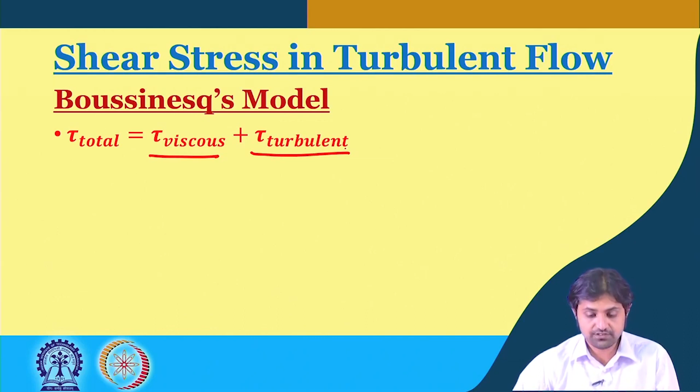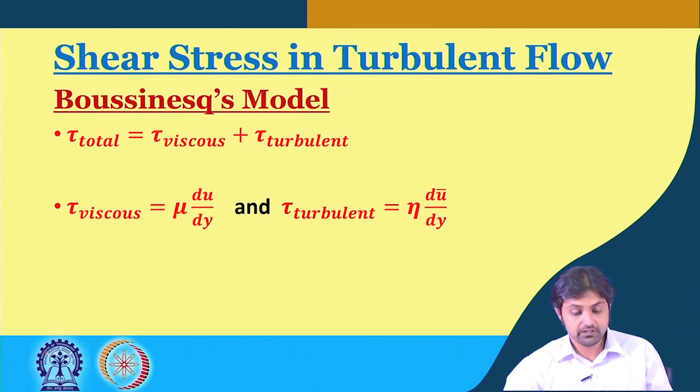So Boussinesq says, as tau viscous is mu du/dy for laminar flow, the shear stress due to the turbulence component is eta du/dy. This is similar — instead of mu there is something called eta, a new coefficient of viscosity, called eddy viscosity. We are not going to the derivation right now; at some point we can see these derivations when the appropriate chapter comes. But for now, take that the shear stress due to turbulence is eddy viscosity times du/dy, very similar to the shear stress in laminar flow, though the coefficient is different.

If we want to write a kinematic eddy viscosity, we write it as epsilon, which can be written as eta by rho, similar to the definition in laminar flow. What is mu for laminar flow? We have been doing that — it is 10 to the power minus 3 Pascal second. So mu for laminar flow is 10^-3 Pascal second, and if the flow is laminar, eta is going to be 0, because it is related to turbulent viscosity.

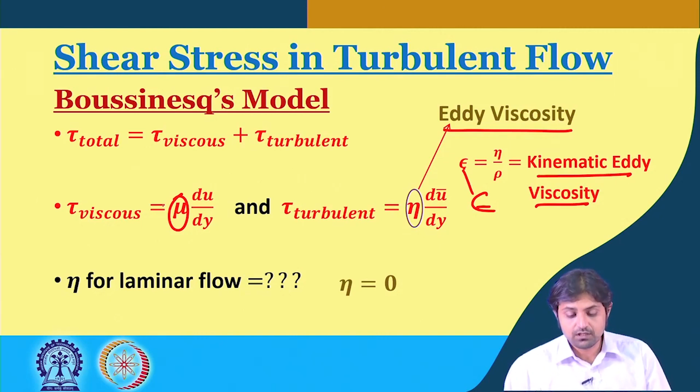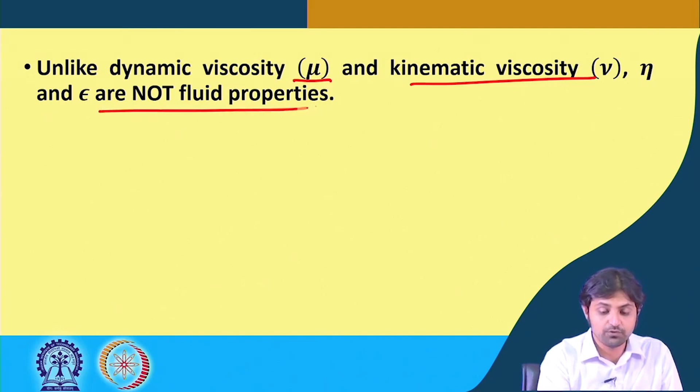So unlike the dynamic viscosity mu and kinematic viscosity nu, eta and epsilon are not fluid properties. The values of eta and epsilon are dependent on the flow conditions. So epsilon, the kinematic eddy viscosity, decreases as you move towards the wall and becomes 0 at the wall.

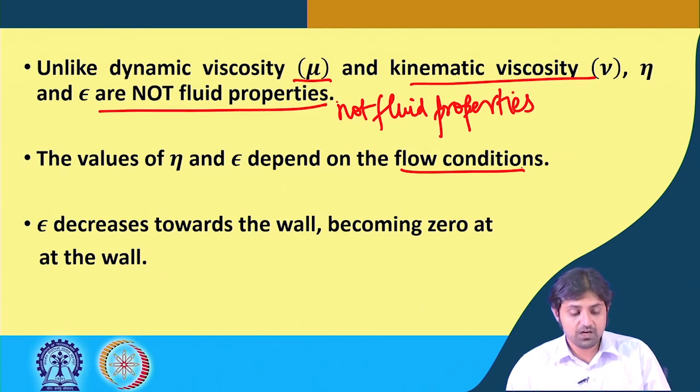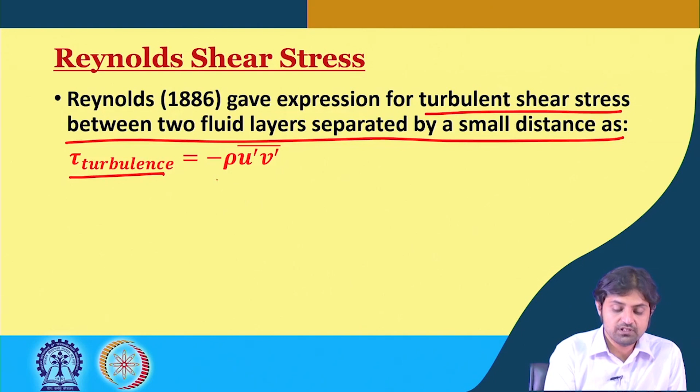Now, coming to what is Reynolds shear stress. Reynolds in 1886 gave expressions for turbulent shear stress between two fluid layers separated by a small distance, and he said that the shear stress due to turbulence can be written as minus rho times u prime v prime, time-averaged. Actually it is not an assumption, but this can be derived, which we will do at some point in this hydraulic engineering course, but not now.

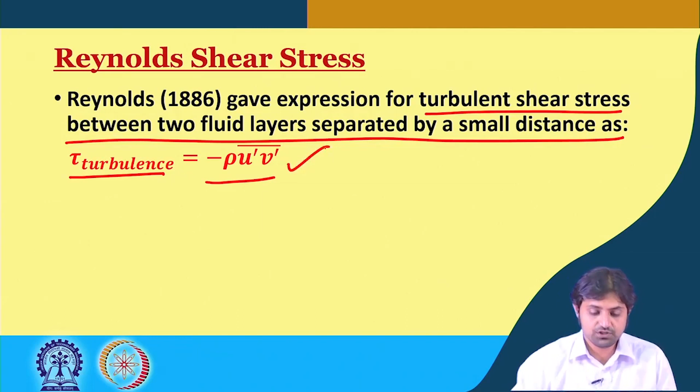So you have to understand Reynolds shear stress is given by minus rho u' v' bar, and it does not have only one component — it also has minus u' w' bar, minus v' w' bar. There are different components, some are normal shear stress, but this is one of the shear stress components.

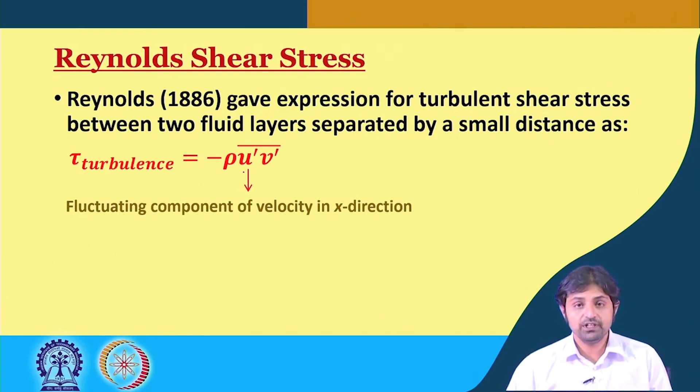What is u prime? That is the fluctuating velocity component in the x direction. V prime is the fluctuating component of velocity in the y direction. Experiments show that u' v' is usually a negative quantity, therefore tau turbulence, or minus rho u' v' bar, is a positive quantity. It has negative correlation, as we will see.

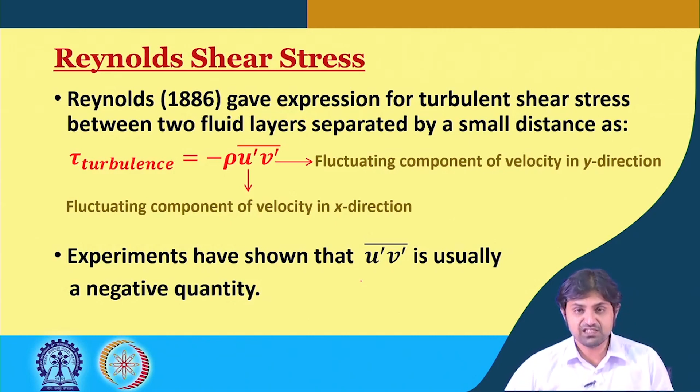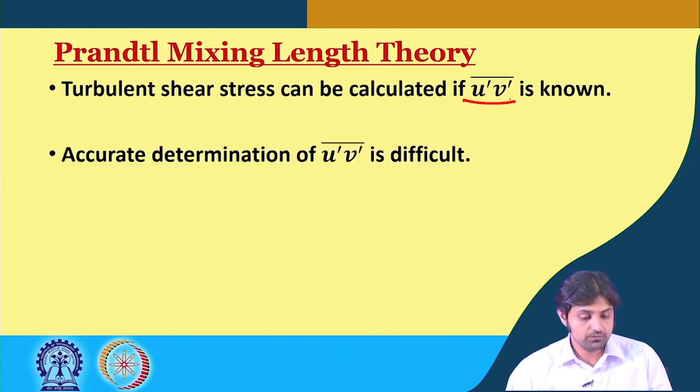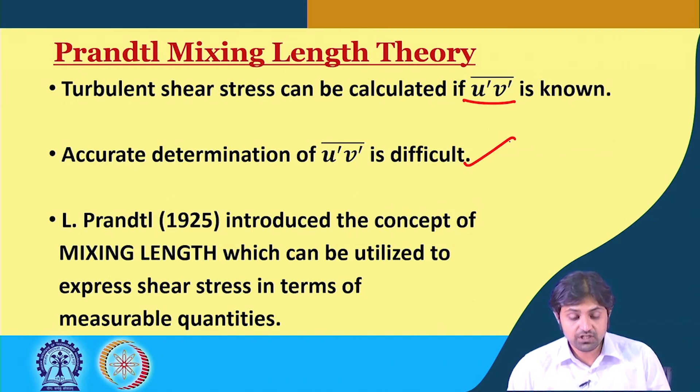Now there is a concept of Prandtl's mixing length theory. Turbulence shear stress can be calculated if u' v' bar is known, because as we saw, tau turbulence by Reynolds was given by minus rho u' v' bar. It would be nice if we could calculate u' v' bar, because that is unknown until now — accurate determination of u' v' bar is very difficult. Therefore, in 1925 Prandtl introduced the concept of mixing length, which can be utilized to express the shear stress in terms of some measurable quantity.

Mixing length Lm can be described as the distance between two fluid layers in the vertical direction, the y direction, such that bundles of fluid particles from one layer could reach the other layer and mix in the new layer in such a way that the momentum of the particle along the flow direction is the same.

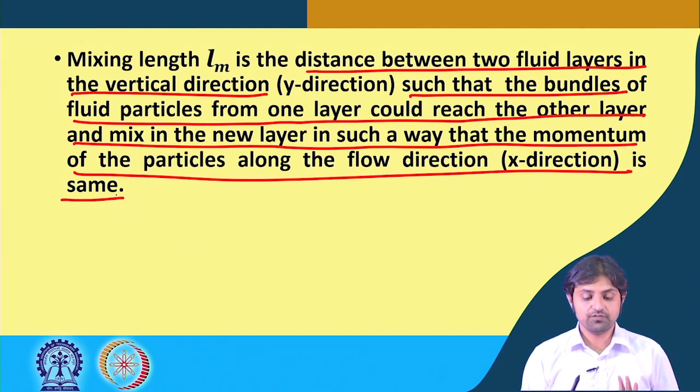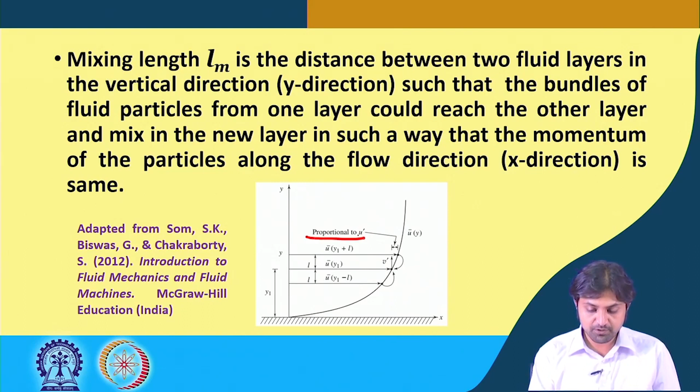We are going to explore this in more detail in the next slide. Prandtl related u prime to the mixing length Lm. He said, as you can see in the figure, u prime is proportional to mixing length, but I'll write it on the next slide.

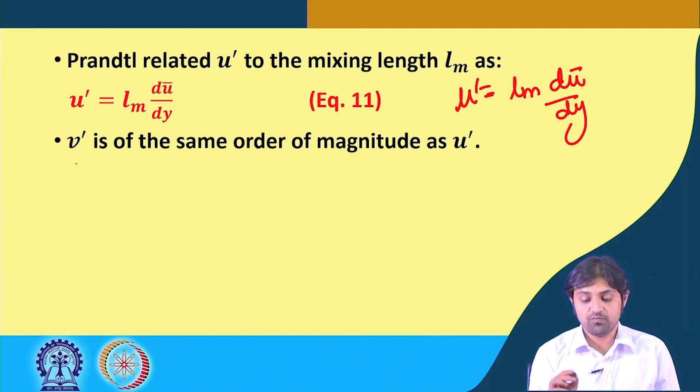He related u prime to the mixing length Lm: u prime can be written as mixing length Lm multiplied by the gradient of the average velocity. So u prime equals Lm times du bar by dy. This was his assumption, where v prime is also of the same order of magnitude as u prime, and similarly this can be written as v prime equals Lm du bar by dy, a similar type of equation.

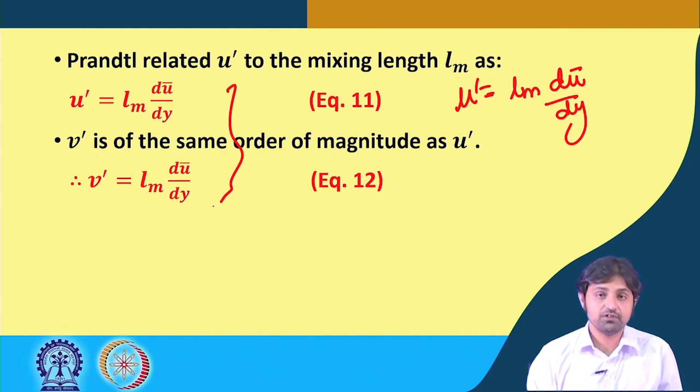If you substitute equation 11 and equation 12 in the Reynolds stress model, which was tau turbulent equals minus u prime v prime bar, minus minus becomes positive, and it becomes tau turbulent equals rho Lm squared du by dy squared. You can substitute and see that Lm du bar by dy multiplied by Lm du bar by dy is the same thing, so it becomes rho Lm squared du bar by dy.

This is equation 13. This is one of the results of the mixing length theory of Prandtl.

Prandtl also assumed that the mixing length Lm is a linear function of distance y from the wall or any solid boundary. Therefore he said Lm can be written as ky.

So if you go back and see, rho is now known, du by dy can be calculated because we are dealing in terms of average velocity, which can be measured. Now the only unknown is Lm. So how do we find Lm? The problem is becoming less and less complex, we are going from one variable to the other, and now the only unknown thing is Lm.

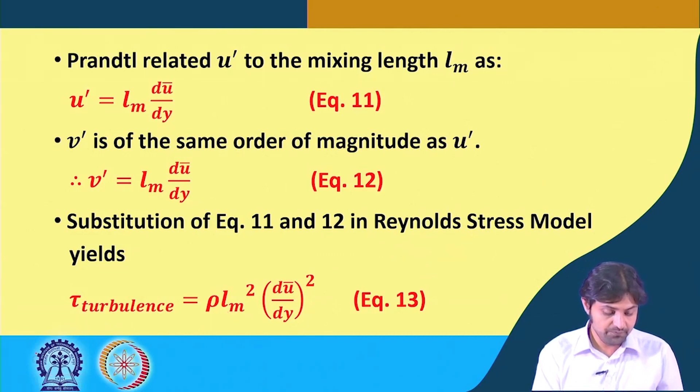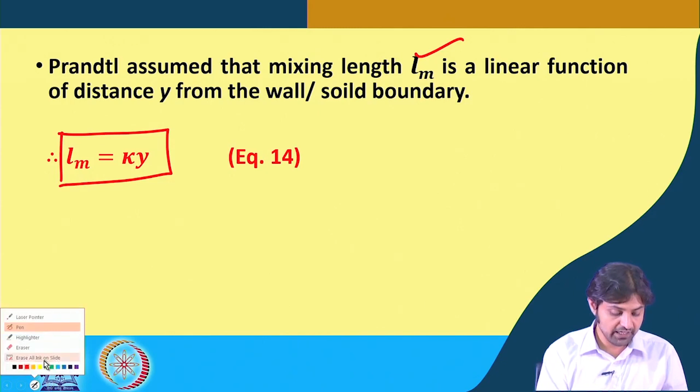So Prandtl needed to relate this to something. He assumed that Lm is a linear function of distance y, and said Lm equals kappa into y, where kappa is known as the von Karman constant and has been found to be equal to 0.4. So mixing length is 0.4 times y. This is quite an important result.

So now we know everything. For example, shear stress in turbulent flow was related in terms of u prime v prime, as proposed by Prandtl, since u prime and v prime are of the same order of magnitude, and is equal to something proportional to du/dy times Lm, where Lm equals kappa into y.

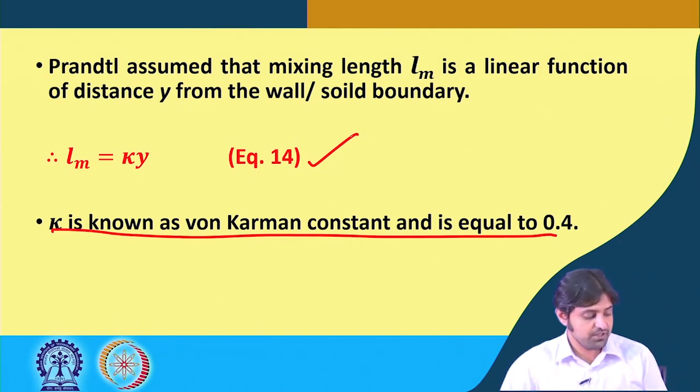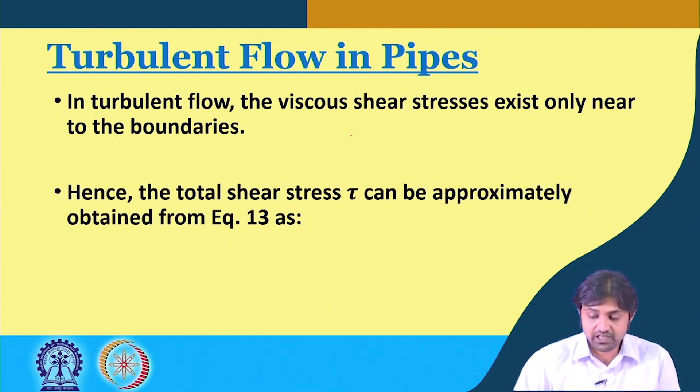Now we will see turbulent flow in pipes. In turbulent flow, the viscous shear stresses exist only near the boundary, and most of the region is dominated by turbulence. So near the boundary, the viscous shear stress acts, and that is the only place where it exists. Hence the total shear stress can be approximately obtained from equation 13.

So we call this equation 15. But because most of the shear stress in turbulent flow is due to the turbulent shear stress, we can neglect the viscous shear stress. We say tau is equal to rho Lm square du by dy whole square, where u is the time averaged velocity, with the over bar dropped for simplicity.

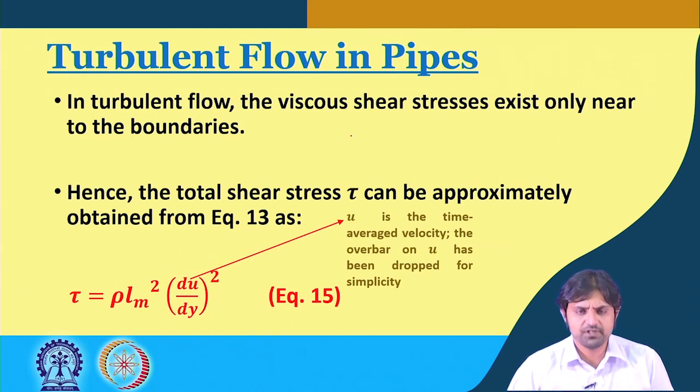If we use equation 14 in equation 15, recall equation 14 was Lm equals kappa into y. So we can write rho kappa y whole square into du by dy whole square, or simply du by dy is 1 by kappa y times root of tau by rho. This is equation number 16.

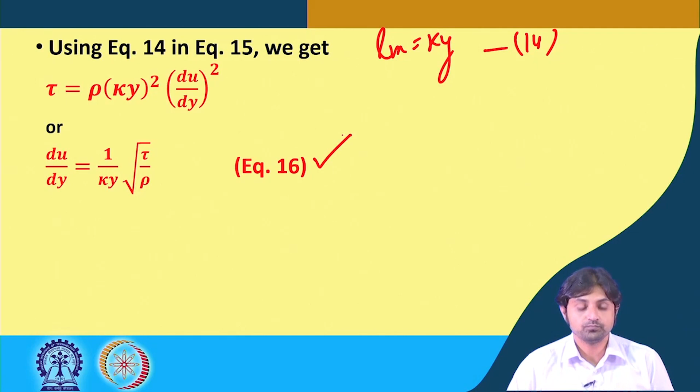For small values of y, it can be assumed that tau is equal to tau naught, where tau naught is the shear stress at the pipe wall and can be assumed to be constant. So at the wall, the shear stress is assumed constant and equal to tau naught.

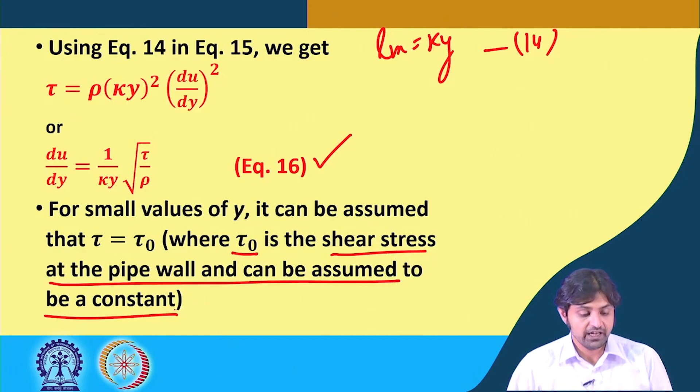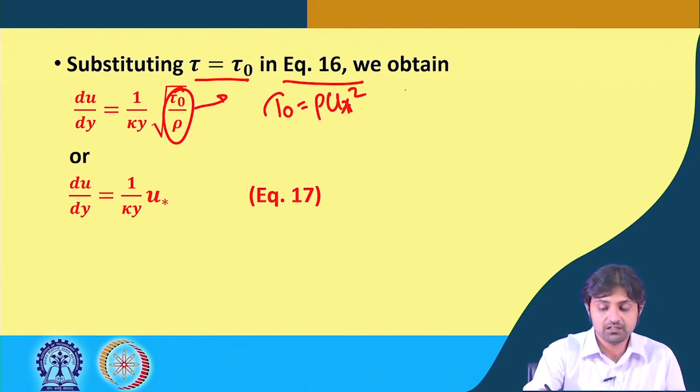If we substitute tau equal to tau naught in equation 16, we obtain du by dy is equal to 1 by kappa y times root of tau naught by rho. But the catch here is that we have considered a small value of y.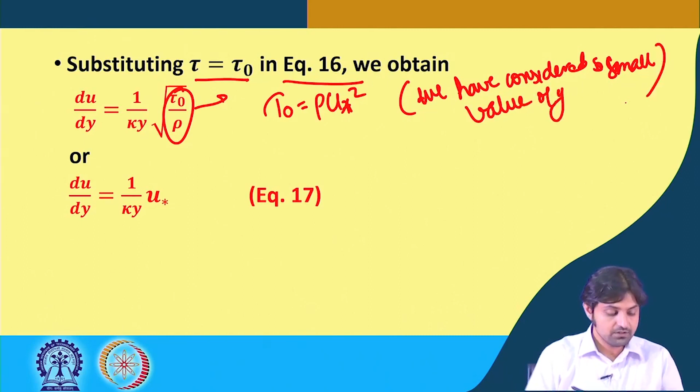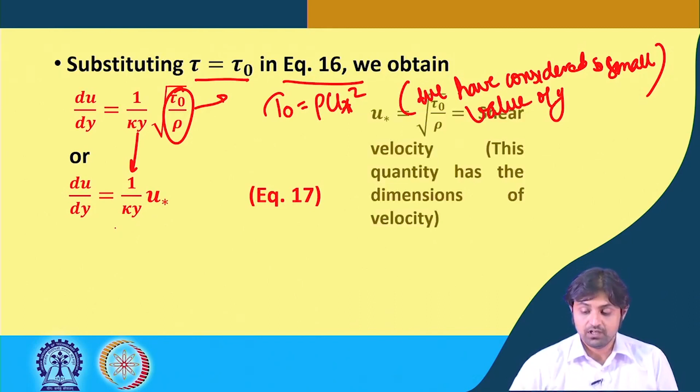So du by dy can be written as 1 by kappa y times u star, where u star, the root of tau naught by rho, is the shear velocity, and this has the dimension of velocity.

If you integrate equation number 17, through simple integration we get u will be u star by kappa ln y plus a constant c. This is very simple integration; you can attempt it.

Then using the boundary conditions: u at y equal to r, where r is the radius of the pipe, we will get u equal to u max. That is what we have seen — at the center line of the pipe, the velocity is the maximum.

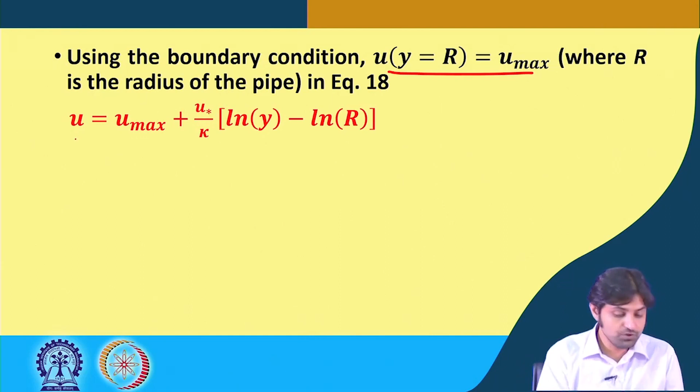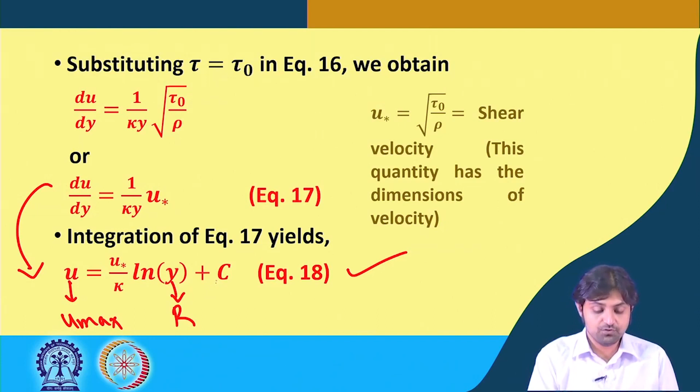If we use this boundary condition, u at y equal to r is u max, we substitute u max and y equal to r, and therefore we can obtain c, which equals u max minus u star by kappa ln r.

Substituting this value of C, we get u equal to u max plus u star by kappa times ln y minus ln r, or u equal to u max plus u star by kappa ln of y by r. Substituting kappa as 0.4, we get u equal to u max plus 2.5 u star ln y by r — this is equation number 20.

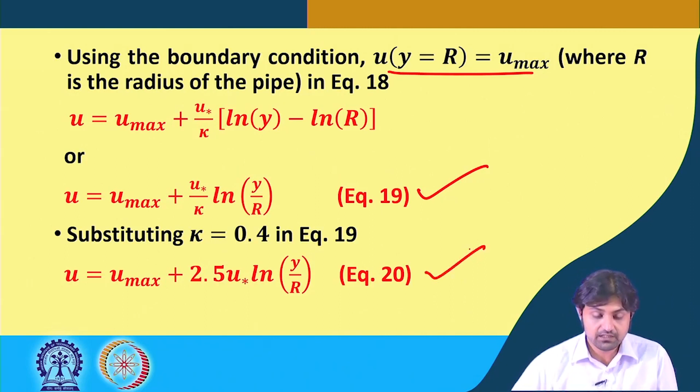This is just simple manipulation, and as you can see, we have derived a logarithmic velocity profile starting with the Prandtl mixing length theory for turbulent fluid flow.

Laminar flow had a profile like this, a parabolic profile. Here the profile is a little different: u is u maximum plus a logarithmic profile, so it looks something like this.

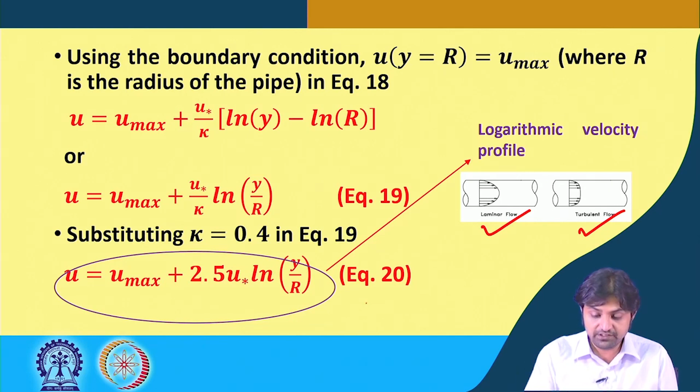Now equation 20 can be expressed differently. We bring u to the other side, so we get u max minus u, since u max will always be larger than u, is equal to 2.5 u star ln r by y, since y will always be less than r.

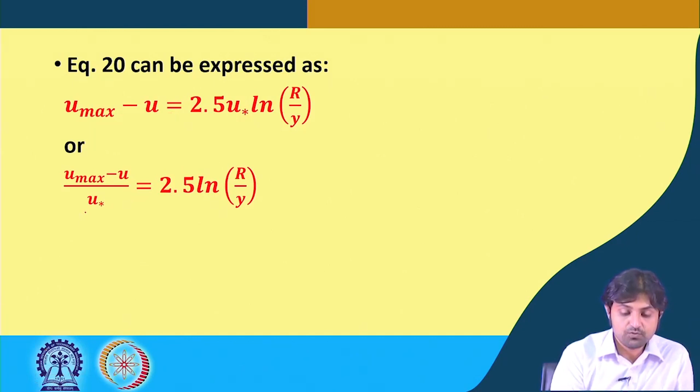Or bringing the frictional velocity u star down by dividing, we get u max minus u by u star is equal to 2.5 ln r by y. Putting this in form of log base 10, through simple manipulation we get u max minus u by u star equal to 5.75 log to the base 10 of r by y.

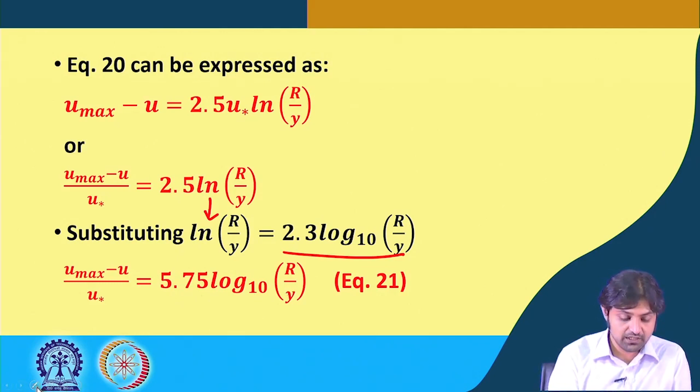U max minus u is called the velocity defect, or velocity defect law. This is just simple manipulation of these terms here.

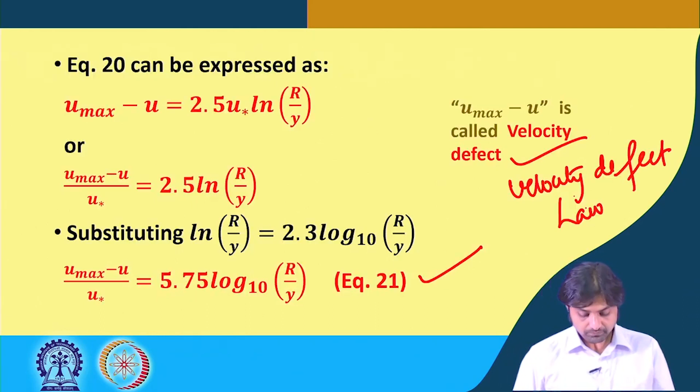Now we are going to solve one of the problems, problem number 7. What we have learned in this particular lecture is about turbulent flow, and this problem will help you in solving any problem based on this particular concept.

It says the velocities of water through a pipe of diameter 10 centimeter are 4 meters per second and 3.5 meters per second at the center of the pipe and 2 centimeters from the pipe center respectively. Considering turbulent flow in the pipe, determine the shear stress at the wall. So we need to determine tau naught. Let us see how we are going to solve this problem.

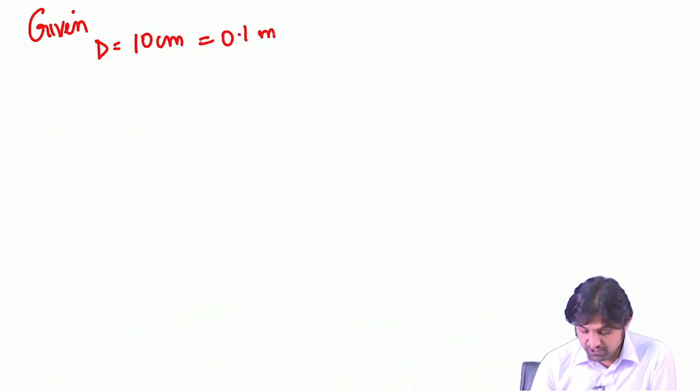We are going to have a white screen first. As always, what we do is write down the given values. Diameter is given as 10 centimeter. Try to always write down in SI units, so we write 0.1 meter. So diameter is 10, so radius is going to be 0.05 meter.

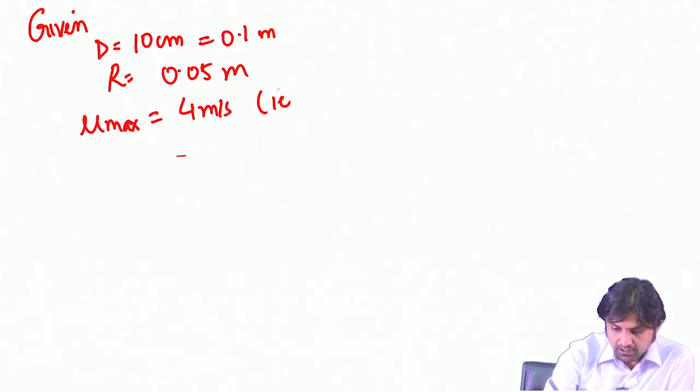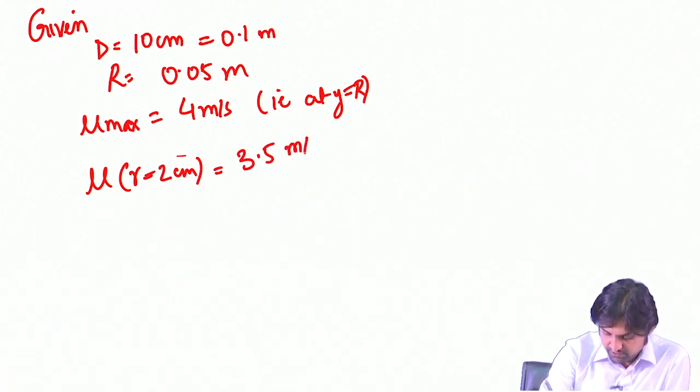u max is given as 4 meters per second, that is at y is equal to R. And this is also given: u at r is equal to 2 centimeter is given as 3.5 meters per second, that is y is equal to R minus r. So y is going to be 5 minus 2, equal to 3 centimeter. So u at y is equal to 3 is equal to 3.5 meters per second.

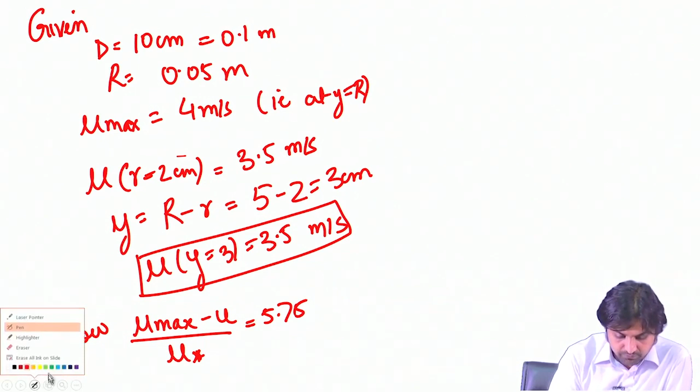Now, u max minus u by u star was 5.75 log r by y. So substituting the values here, from this equation: 4 minus 3.5 divided by u star is equal to 5.75 log base 10 of 5 by 3.

This will give us u star as 0.392 meters per second. We also know u star is the square root of tau naught by rho, or tau naught is rho u star whole square. Therefore, tau naught, with rho as 1000 and u star as 0.392, whole square, so tau naught is coming out to be 153.6 Newton per meter square.

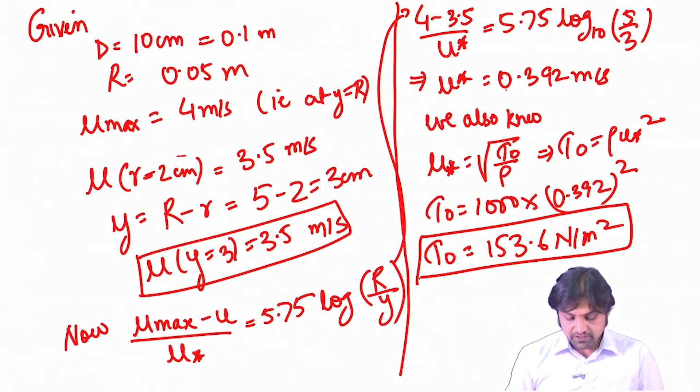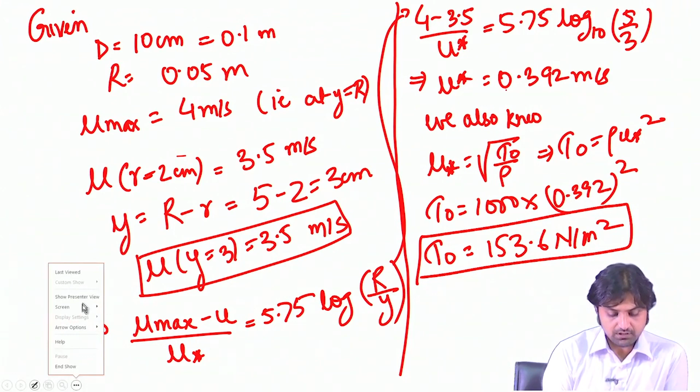This is the solution to the question that we have at hand. So, going back again to the slide, what we got was approximately 153 Newton per meter square, the shear stress at the wall.

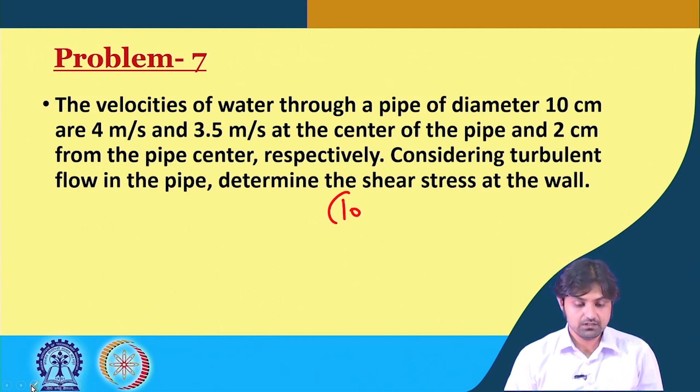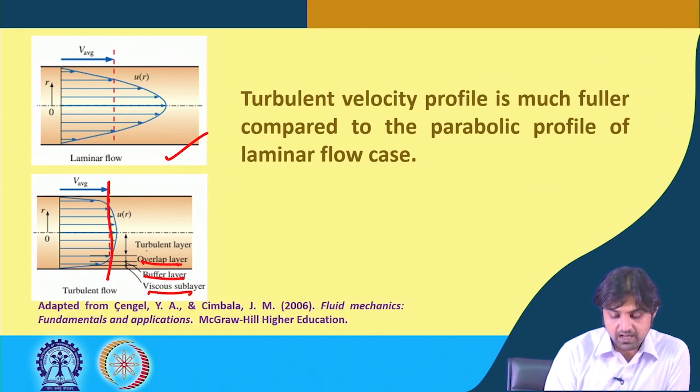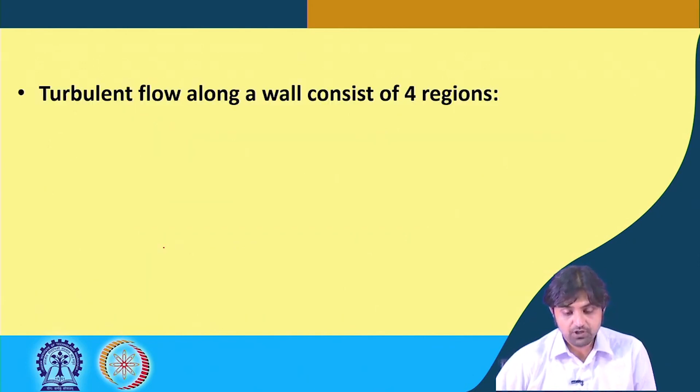As I told you in the last slide, there are different layers in turbulent flow, and we are going to talk about that. Turbulent flow along a wall consists of 4 regions. The viscous sublayer is the layer next to the wall, closest to the wall, where the viscous effects are dominant and the velocity profile is almost linear.

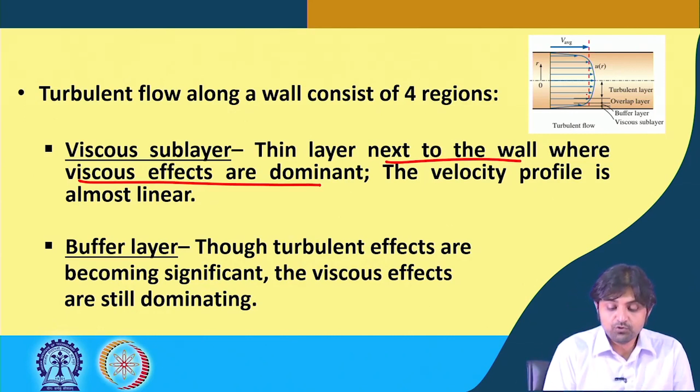In the buffer layer, though turbulent effects are becoming significant, the viscous effects are still dominating. In the overlap layer, the turbulent effects are much more significant but still not dominant. In the turbulent layer, the turbulent effects dominate over the viscous effects.

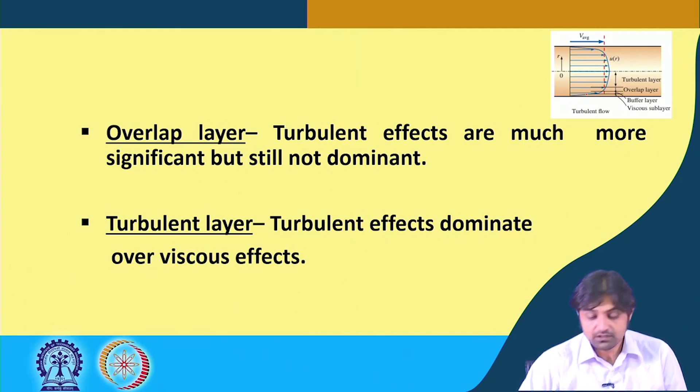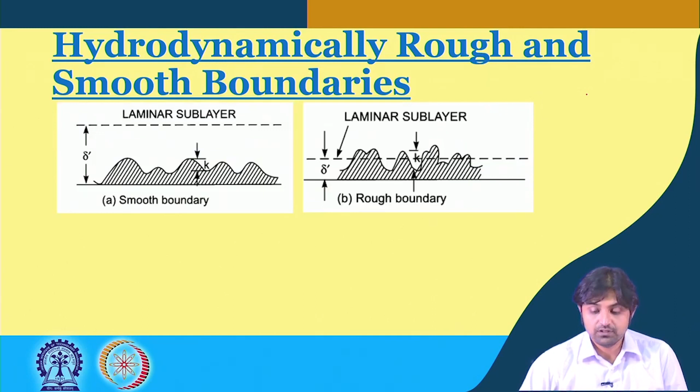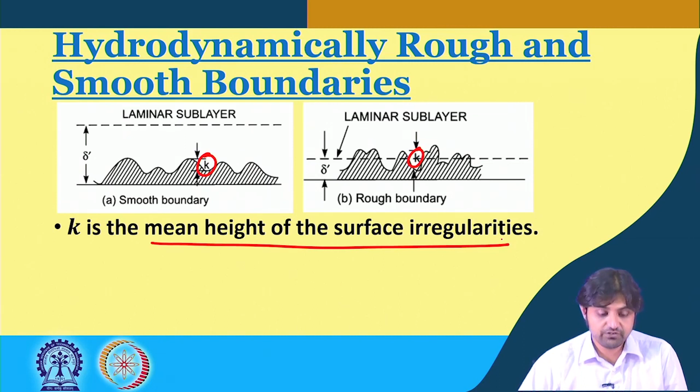Now, when it comes to these beds and regimes, some of the important terms are hydrodynamically rough and smooth boundaries. There is a term called K here. K is the mean height of the surface irregularities. We talked in the beginning that turbulence could occur due to the presence of irregularities on the surface. So let us say the mean height of the surface irregularities is K, and delta dash, for example, is the height of the viscous or laminar sublayer, the first layer we talked about, where the velocity profile was almost linear.

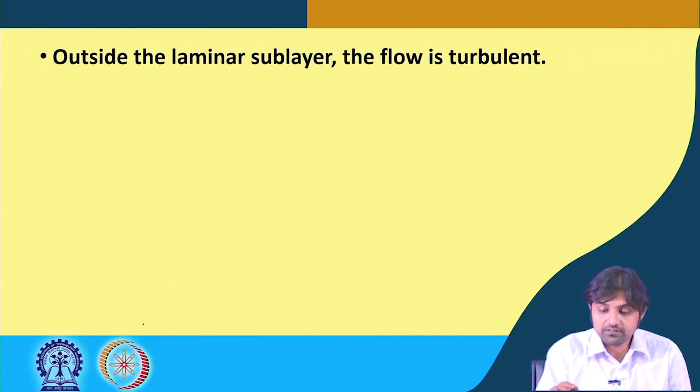Outside the laminar sublayer, the flow is turbulent, as we have discussed. Eddies present in the turbulent zone try to penetrate the laminar sublayer and interact with the boundary.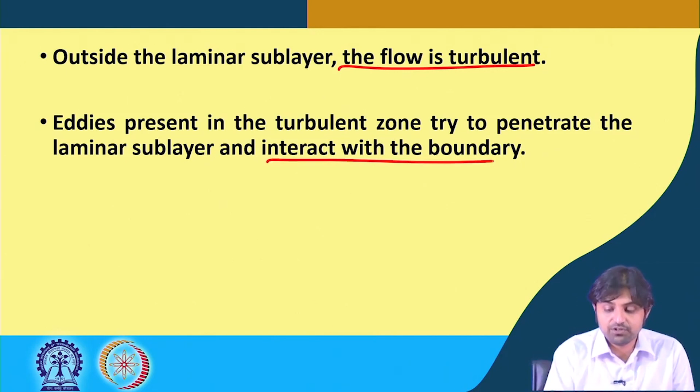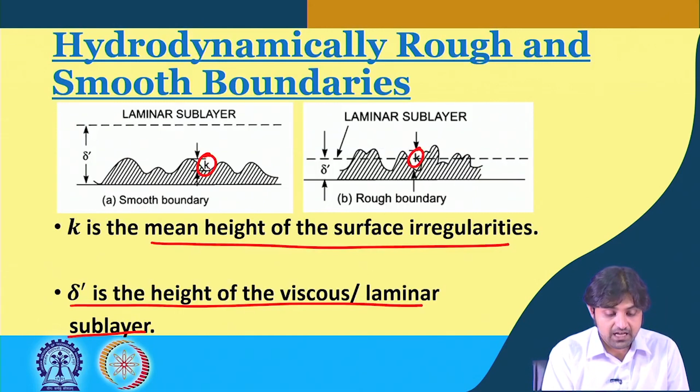But when the surface irregularities are much smaller than delta dash, the height of the viscous sublayer, the eddies are unable to reach the surface irregularities. When the roughness height is much less, we define that boundary as a smooth boundary. So, smooth boundaries are ones where the thickness of the viscous sublayer is much larger than the surface irregularities.

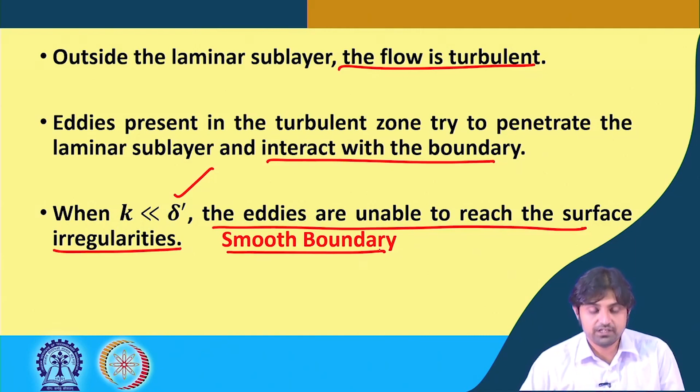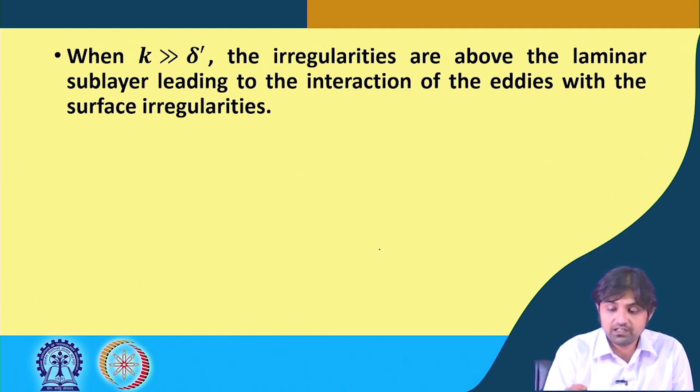We will see what those surface irregularities are, represented by K. When K is much larger than delta dash, the thickness of the viscous sublayer, the irregularities are above the laminar sublayer, leading to interaction of eddies with the surface irregularities, and therefore these are called rough boundaries.

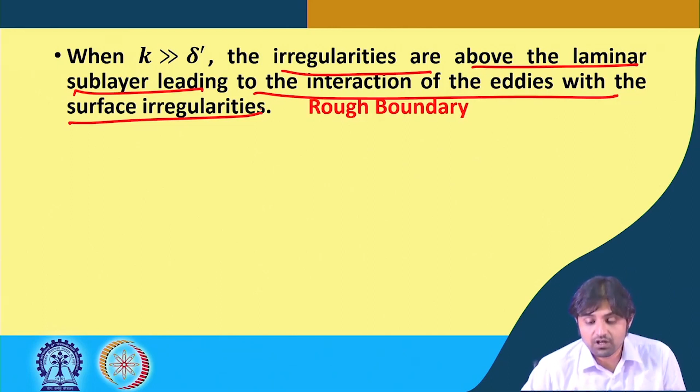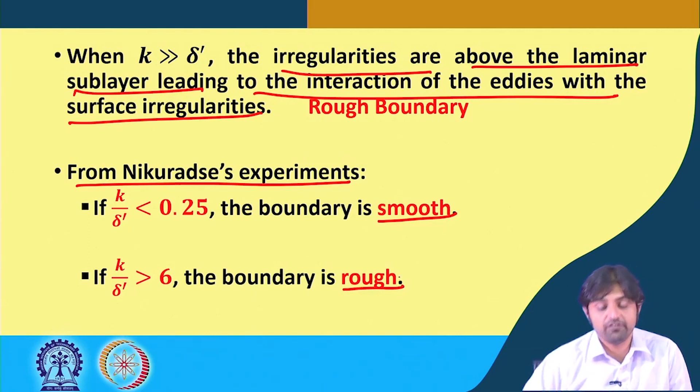These values, which we are going to talk about, have been derived from experiments by Nikuradse. Nikuradse said if K, the height of the irregularities, divided by the thickness of the viscous sublayer, is less than 0.25, the boundary is smooth. If K by delta dash is greater than 6, the boundary is for sure rough. But if it lies between 0.25 and 6, the boundary is transitional.

In terms of roughness Reynolds number, there is something called roughness Reynolds number that is dependent upon K, the height of the irregularities. If this Reynolds number is less than 4, the boundary is smooth. If it is more than 100, the boundary is rough, and if it lies between 4 and 100, the boundary is transitional.

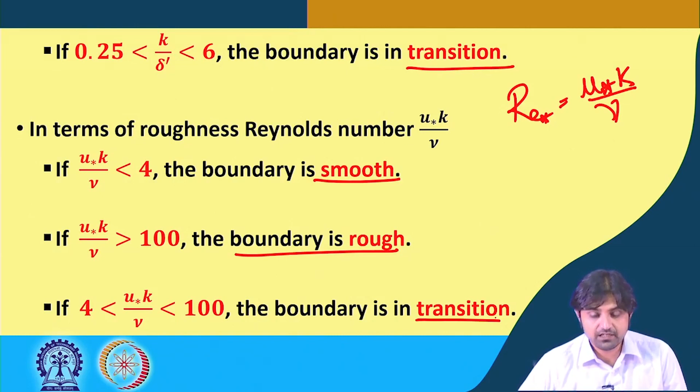So, either we can calculate it in terms of K by delta dash, where K is the height of the irregularities and delta dash is the viscous sublayer, or more easily, it is U star K by nu. If this is less than 4, it is smooth. If it is more than 100, then rough. Otherwise, in between, it is a transitional boundary.

Now, we will solve one problem about this particular concept.

The question is: a pipeline carrying water has average height of irregularities projecting from the surface of the boundary of the pipe as 0.15 millimeter. What type of boundary is it? We have to estimate whether it is rough, smooth, or transitional. The shear stress at the pipe wall is 4.9 Newton per meter square, and the kinematic viscosity is 0.01 Stokes. So, shear stress at the wall is given, right?

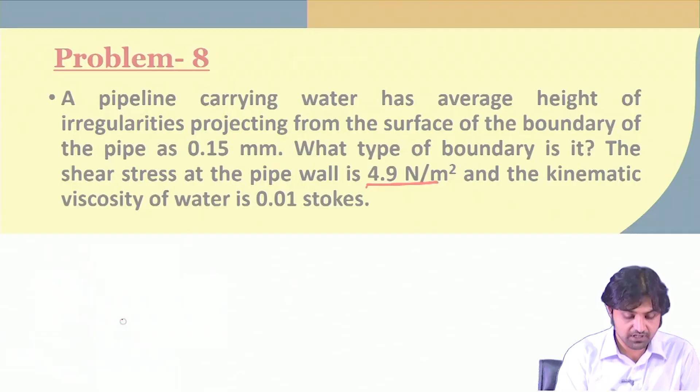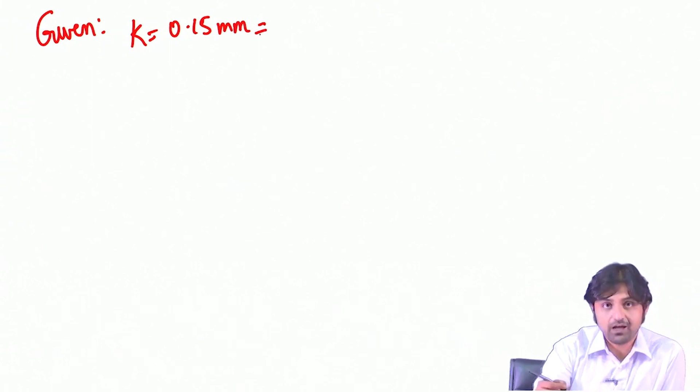So, we will be able to calculate U star from here, but let's go and start doing the problem as we have been doing. We have to write down what has been given to us. K is given as 0.15 millimeter. It is always a good habit to convert it into SI units, into 10 to the power minus 3 meter.

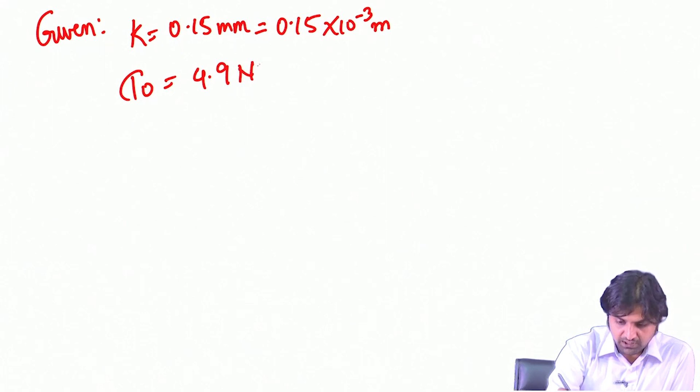Tau naught is given as 4.9 Newton per meter square, and nu is also given, 0.01 into 10 to the power minus 4 meter square per second. Therefore, we can calculate U star as under root of tau naught by rho, as I told you, and this comes out to be under root of 4.9 by 1000, which is 0.07 meters per second, very simple.

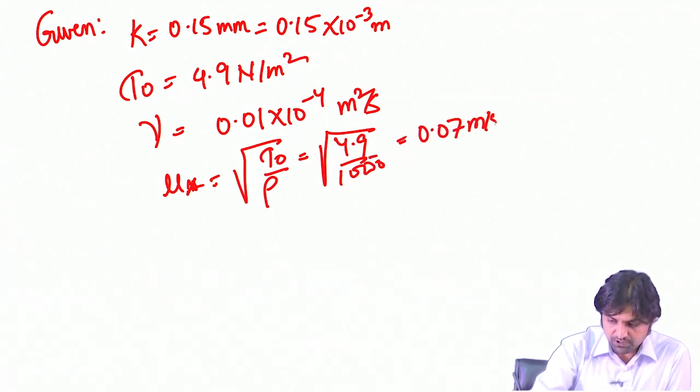So, best is to calculate the roughness Reynolds number, Re star, which is given as U star K by nu. Re star is, U star is 0.07, K is 0.15 into 10 to the power minus 3, and nu is 0.01 into 10 to the power minus 4, and that comes to be 10.5.

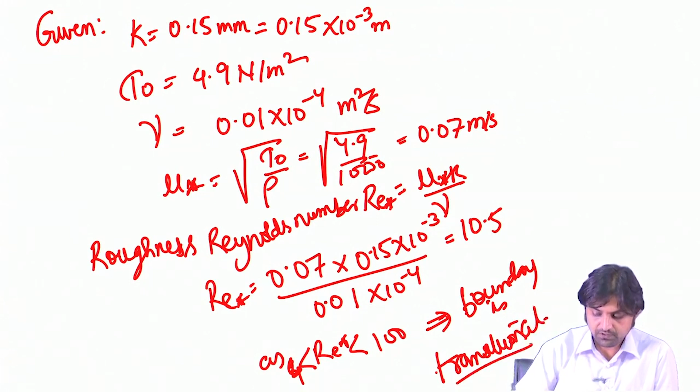So, as Re star lies between 4 and 100, this implies that the boundary is transitional. Going back to that screen, what we have got is Re star is 10.5, implying a transitional boundary.